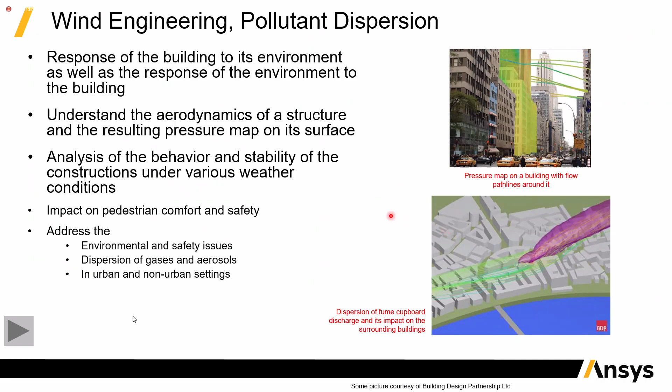Wind engineering, pollutant dispersion, nasabi ko na yan kanina, pedestrian comfort, etc. So there are a lot of objectives: aerodynamic, noise, solar loading, even on the form of health and safety. Matatapos na yung oras ko. I'll just quickly run through everything.

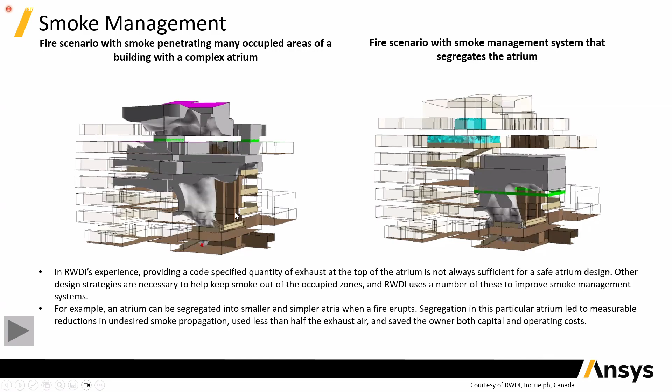You want to understand how smoke behaves inside your building, how smoke disperses from the ground level towards the upper level of my building. How do you ensure that your smoke exhaust ventilators will properly exhaust the smoke that is generated in an event of a fire outage? Kailangan mo bang sunugin yung building para malaman na tama yung design mo? Normally, hindi. You just use a CFD analysis. So, these are the examples.

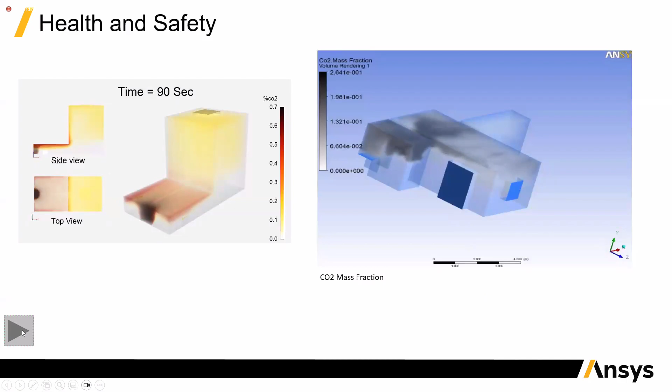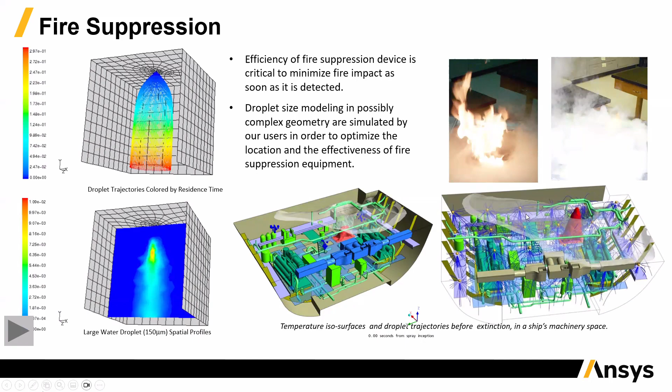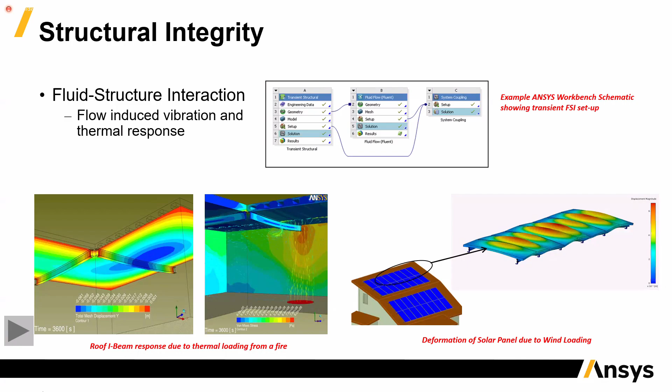You can visualize how smoke will disperse inside your indoor environment using a CO2 mass fraction analysis. Even on the design of your FDAS, sa mga nagde-design ng fire sprinkler system, will my FDAS sprinkler heads effectively extinguish fire in an event that it occurs? Structural integrity, after the fire event, will the structural framing still be reliable? Hindi mabibigay yung building afterwards. Fire safety simulation, smoke simulation, warehouse analysis.

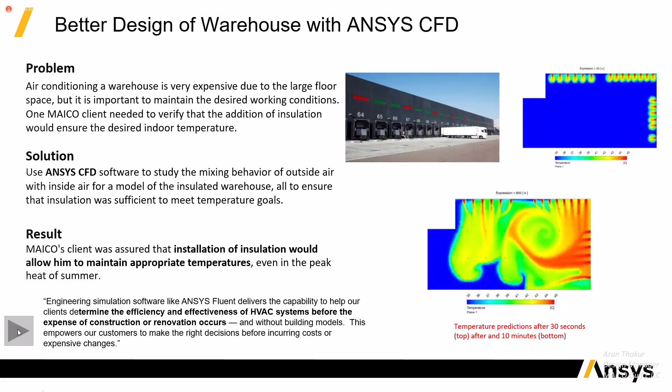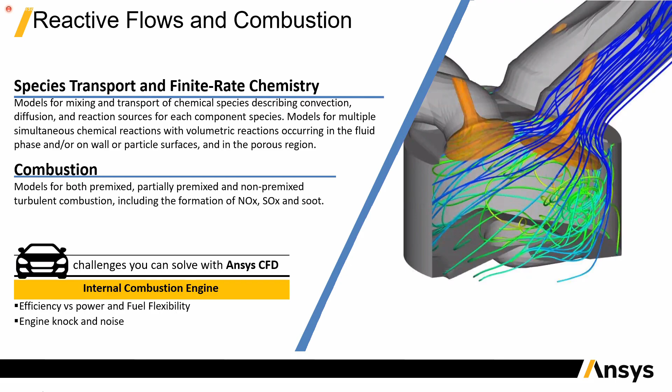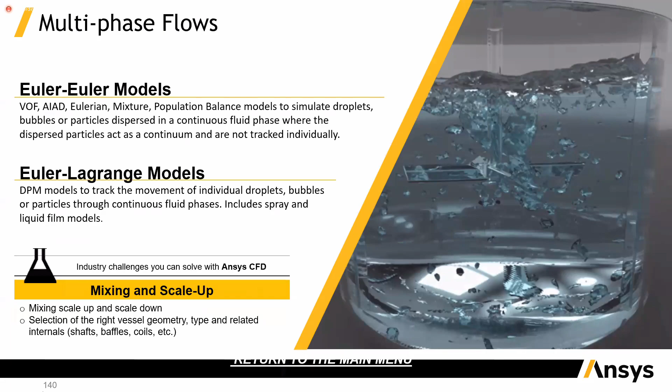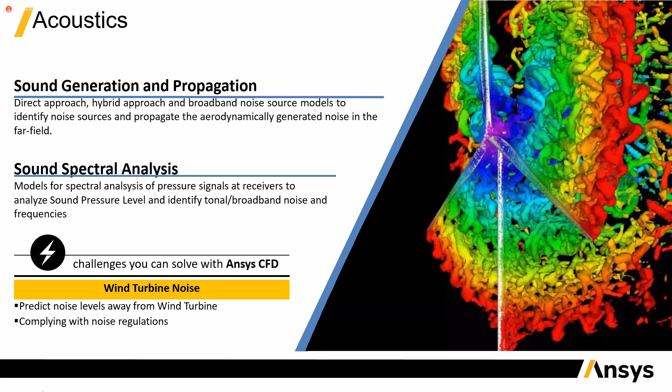Patapos ng oras ko. So in summary, using CFD analysis, you can analyze turbulence flows. You can analyze reactive and combustion flows. You can understand heat transfer, whether it be conduction, convection, or radiation. You can do multi-phase analysis, solid to liquid, liquid to gas, gas to solid. Moving parts, rotating equipments, turbo machineries, acoustic, aeroacoustic analysis using Ansys. If you are designing a wind turbine, design optimization, as I said earlier.

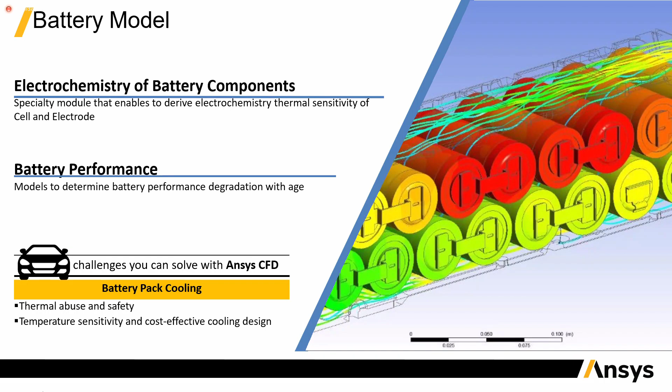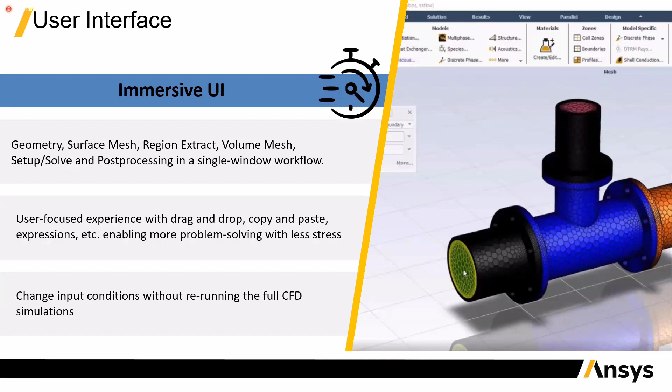Battery modeling, this is very complex, but it was discussed yesterday. Those who are in the Zoom presentation kahapon, diniscuss ito. It's very complex. Icing, kapag nagkakaroon ng ice sa component ko. User interface is very easy to use. It's very easy to understand. You can customize your post-process view. Meshing is very awesome. Post-processing, you don't need a third-party software to do the post-processing for you.

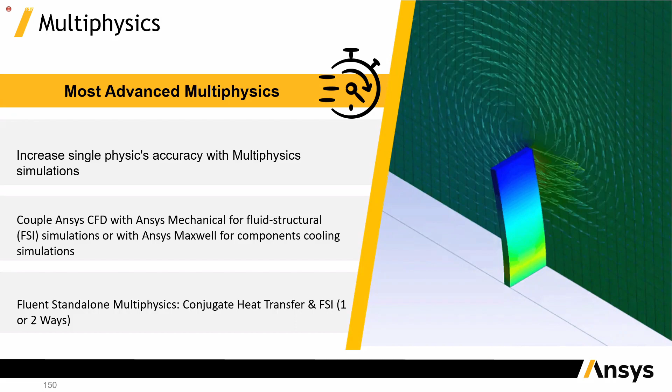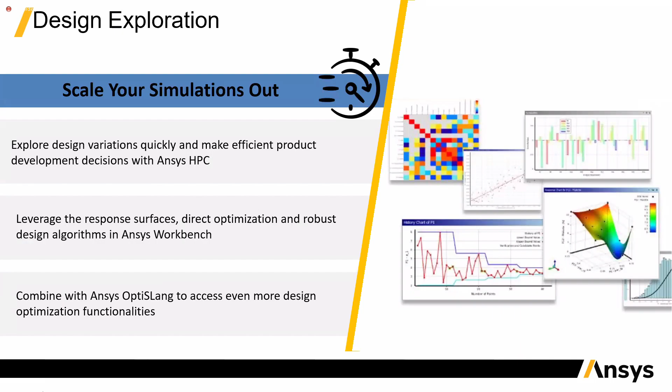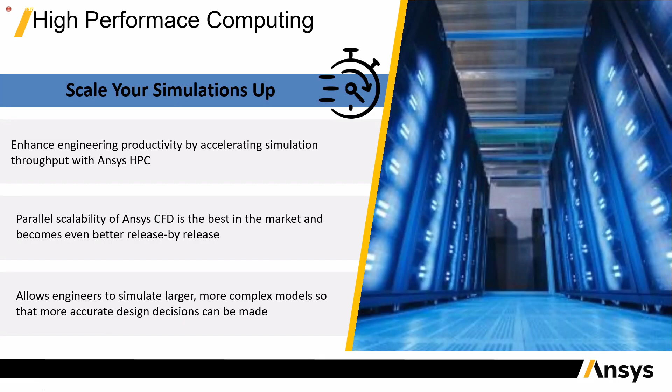Multi-physics, you can do an analysis in thermal, and that thermal can be coupled with your structural. The structural can be coupled with your electrical and electronic simulation, all in one single software. Discrete elements, particles, design exploration, parametric analysis, topology optimization, reduced order models, hindi ko na ito madi-discuss. High performance computing, if wala kang magandang computer, you can rent computers on the cloud to do the analysis for you. So that's the end of my presentation. I barely made it to 1 hour.

So anong natutunan natin? If you are a student, you can properly bridge the academe and the industry. If you are a design consultant, you will be able to understand how CAE is used or realized in your design environment spaces. If you are a professor, you will be able to visualize different theses, different research for your students. So that is the end of my presentation.